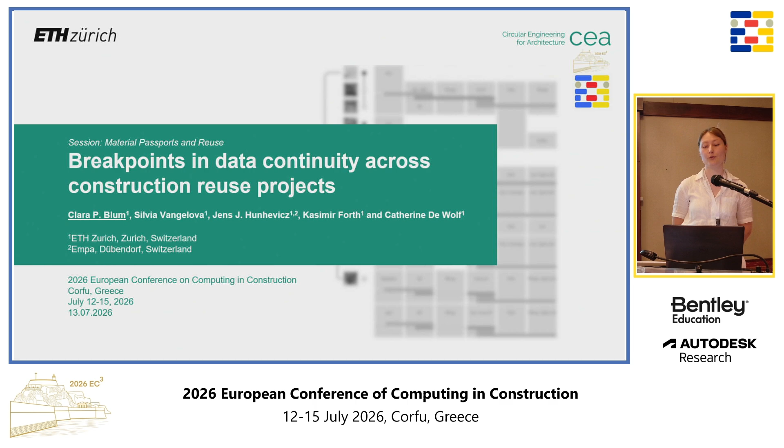All right, thank you. Hello everyone, my name is Clara Blum, and today I have the pleasure to present you our work Breakpoints in Data Continuity across construction reuse projects. This work was conducted at the Lab for Circular Engineering for Architecture in collaboration with Silvia Vangelova, Kasimir, Jens Hunhevicz, and Catherine De Wolf at ETH Zürich and Empa.

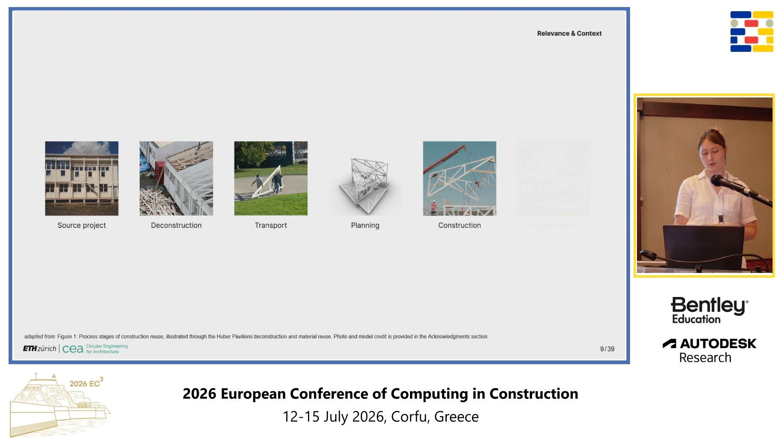Reuse is increasingly recognized as a key strategy for circular construction. However, many reusable materials remain unused. As Lucas already mentioned, elements from source projects move through deconstruction, transport and storage, planning, and reconstruction, and we repeatedly observe that material information is lost. Much research exists in logistics and digital representation. However, there is limited empirical understanding of how these infrastructures interact or fail to interact as materials move between projects.

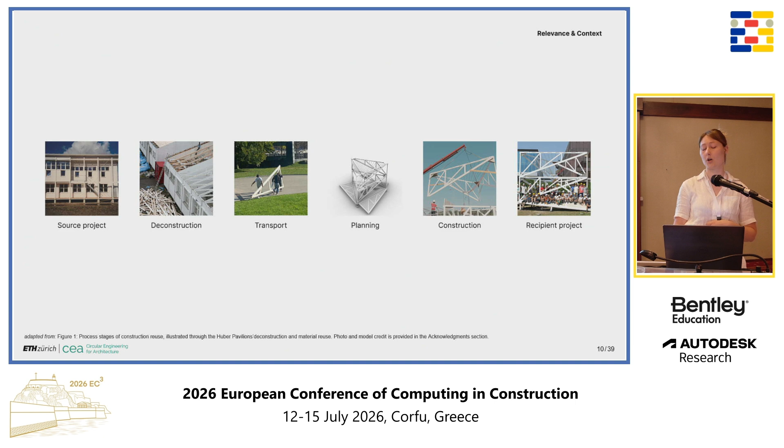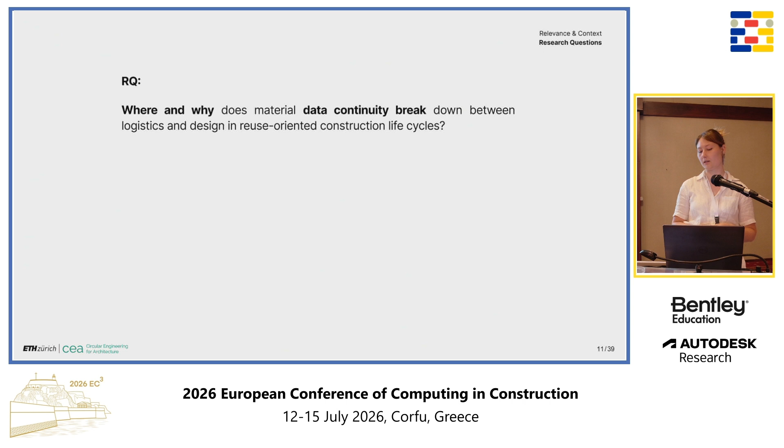So we asked ourselves, as materials move from one project to another, where and why does material data continuity break between logistics and design in reuse-oriented construction life cycles? And to answer this, we defined a framework and so-called breakpoint classes of discontinuities between the framework components, and then applied these across 8 reuse case studies to provide empirical insight on where and why material data continuity breaks down.

Our starting point was the observation that reuse projects operate through 2 separate digital ecosystems, logistics and design. The logistics side focuses on tracking and inventory management, whilst the design side focuses on digital representation. Both describe the same physical materials, but often use different and disconnected identifiers, databases, and workflows. And our hypothesis was that many reuse problems emerge precisely at the interface between these 2 systems. So rather than treating logistics and design as separate data domains, we propose a shared framework that integrates both.

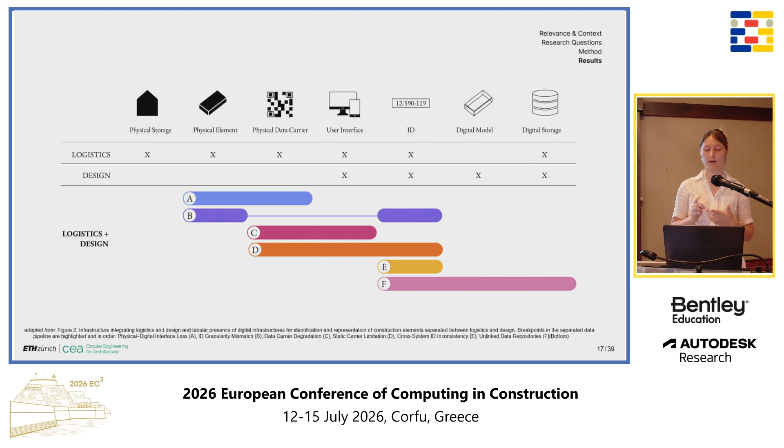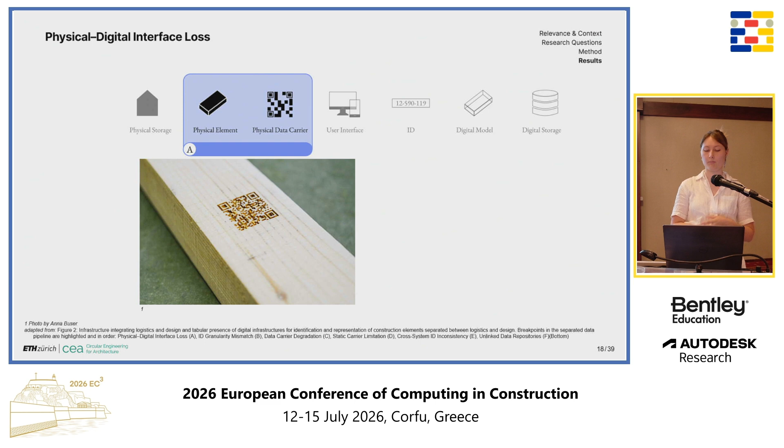And this revealed 6 recurring classes of breakpoints, ranging from physical-digital interface failure to inconsistencies between identifiers and disconnected data repositories. Each covers different discontinuities between components of this framework, which result in identity loss during reuse processes. For one, the loss of connection between a physical element and its data carrier. So when elements are cut or transformed during reuse, the carrier may be removed or damaged, making the element's identity and data inaccessible. Further, we find mismatches caused when we switch between instance and type level IDs. So when elements are grouped under one generic identifier, individual components can no longer be clearly distinguished or traced.

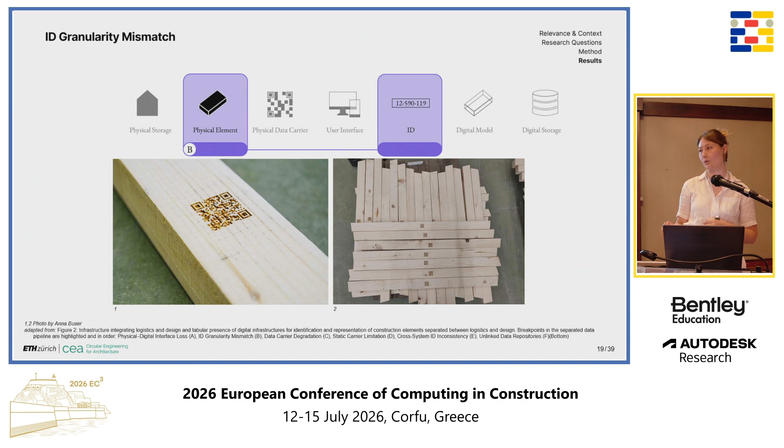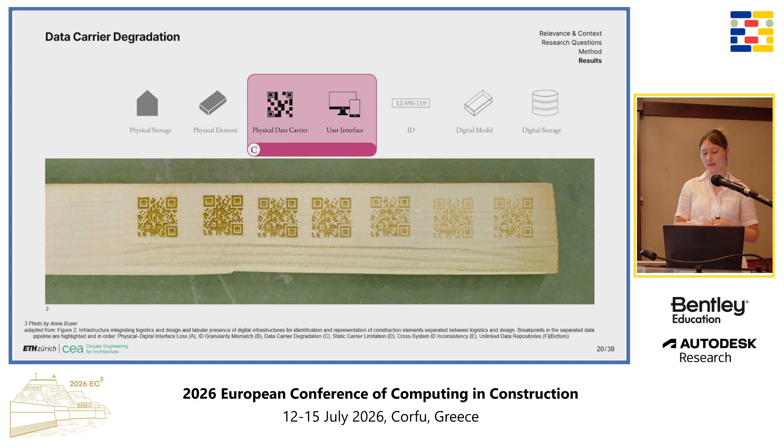Another obstacle describes where the data carrier remains not readable through the user interface. So if the carrier is damaged, worn, or degraded over time, access to the element's identity and the stored data is lost. And if the carrier cannot be adapted over time, changes to the element's ID or data may not be reflected during reuse, which also addresses the absence of long-term maintenance and access control mechanisms, highlighting also governance-related challenges for material passport systems.

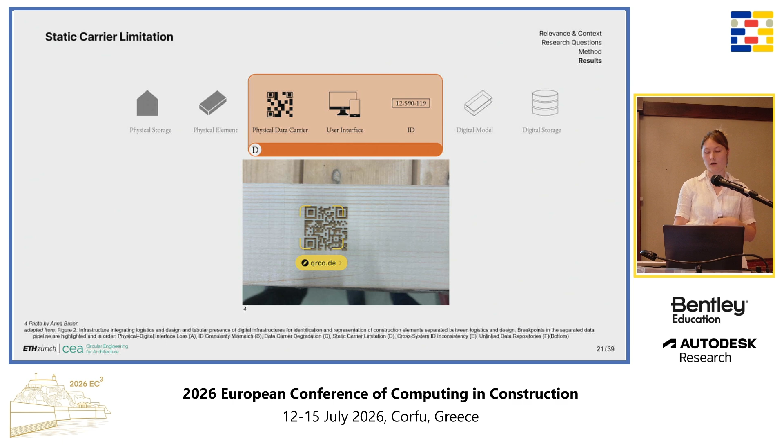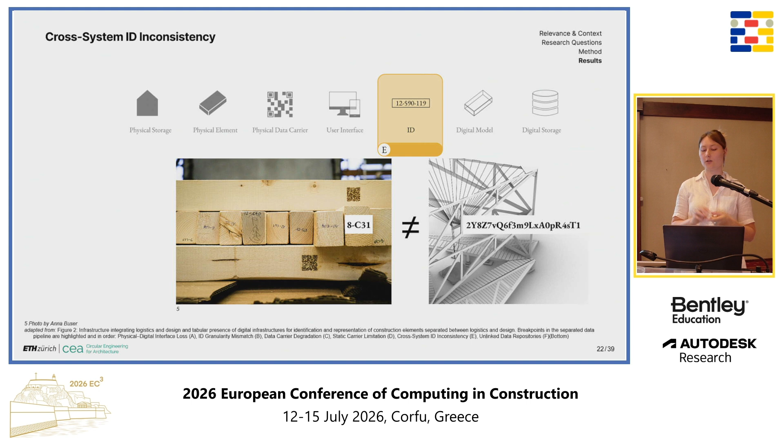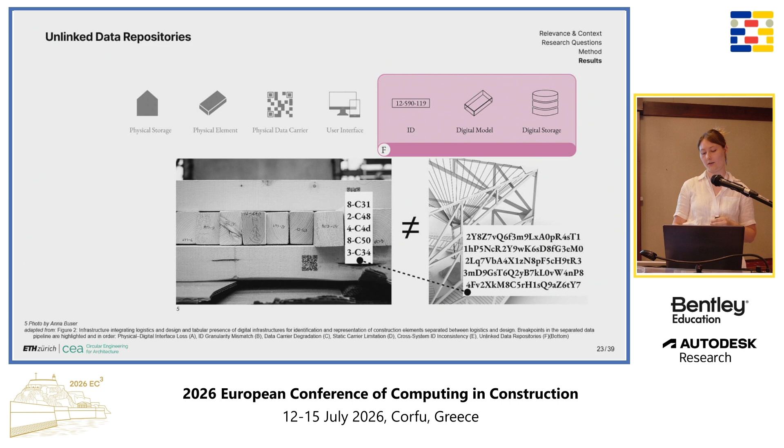And one core breakpoint is also cross-system ID inconsistencies, so when the same physical element has different IDs across systems, its digital and logistical records and their coordination become difficult to align. And lastly, the problem of unlinked IDs and model storages. So if both systems store related data separately, updates become duplicated and remain manual coordination whenever changes occur.

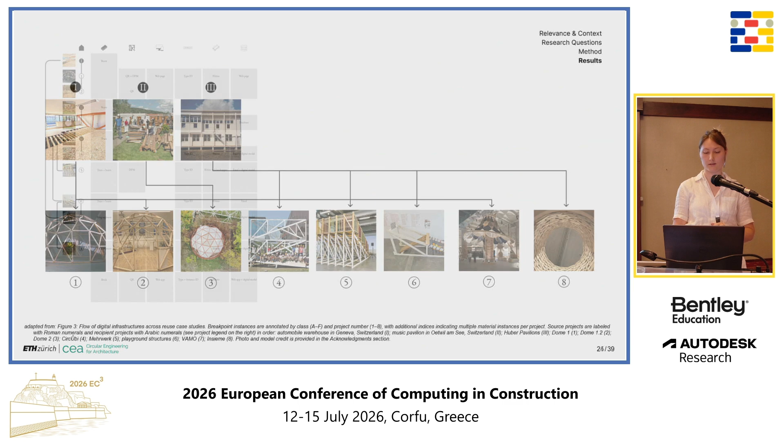We then applied this framework to 8 reuse case studies conducted in the past 5 years at ETH Zürich with materials sourced from 3 deconstruction projects. The 8 case studies are all temporary structures built at our lab, which also facilitated data access and allowed for interviews with colleagues involved in the processes. For each project, we reconstructed how materials and information moved through the reuse processes and documented where breakpoint events occurred.

And we found that the highest occurrence was in cross-system ID inconsistencies and unlinked data repositories, followed by physical-digital interface loss and ID granularity mismatches, and static carrier limitations. Carrier degradation was not present in the case studies analyzed here. Overall, material identities were repeatedly detached from their physical element when elements were transformed, when identifiers were reduced from instance level to type level ID, or when information became distributed across different disconnected systems.

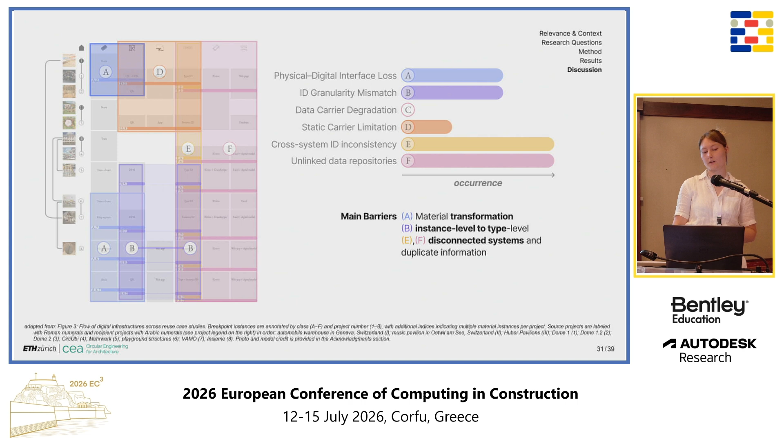Inventory systems and digital design models increasingly describe the same material in different ways, requiring manual coordination and limiting digitally integrated reuse workflows. This also suggests that one primary barrier to reuse is not the absence of digital tools, but the absence of synchronizing the identifiers across design and logistics. Today, materials survive multiple life cycles, whereas their identities often do not.

And this study investigated where and why material identification and digital representation fail to persist across reuse life cycles. We first proposed the framework that integrates logistics and design infrastructures within a shared infrastructure, and then defined these recurring breakpoint classes to make these discontinuities between the infrastructures explicit. And third, we demonstrated these breakpoints empirically across 8 reuse cases and used them to derive recommendations for continuity-oriented digital infrastructures.

The goal of the study was not to evaluate a specific technology, but as we know, the construction industry already has sophisticated digital infrastructures. But the problem is that they're developed independently. So this paper provides a systematic way to analyze these discontinuities between them. Across all breakpoints and use cases, one aspect dominated, the identifier. And even though all components of the framework are important to retain identity, the identifier builds the central anchor ensuring the interface between physical materials and all digital representations. This is also a small outlook to the following presentation, where we'll look at a first solution proposal for 2 of the case studies presented.